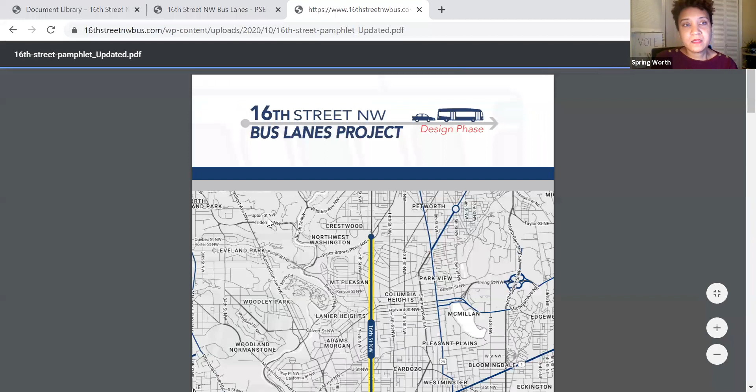There also are narrated presentations that provide an overview of the project from earlier years, if you're interested in taking a deeper dive into the project details. So this is the pamphlet, and it gives you a general project overview of what we're trying to accomplish along the 16th Street corridor.

I do want to say, as I mentioned before, that we've completed design, so we're really happy about that, and we anticipate starting construction. So we're not taking any comments on the designs. We're getting ready to break ground on the corridor.

There have been a couple of small changes since our last public meeting. We originally anticipated putting in hatched bus lanes, like a striped red bus lane and black asphalt. But to remain consistent with what you see on other corridors in the district, and across the country, we are putting in full red bus lanes.

Similar to Georgia Avenue, we have bus lanes from Florida to Barry, and also on H and I streets downtown, you'll see bus lanes. These bus lanes will be very similar, full red paint.

The other change we made during design, to accommodate traffic operations, is we are starting the PM peak period at 3:30, extending to 7. We originally proposed during the planning process that we would start the PM peak from 4 to 7:30, but we're moving that back just a little bit earlier. It's the same length of time — we're just moving the start of the PM peak to 3:30 to 7 instead of 4 to 7:30.

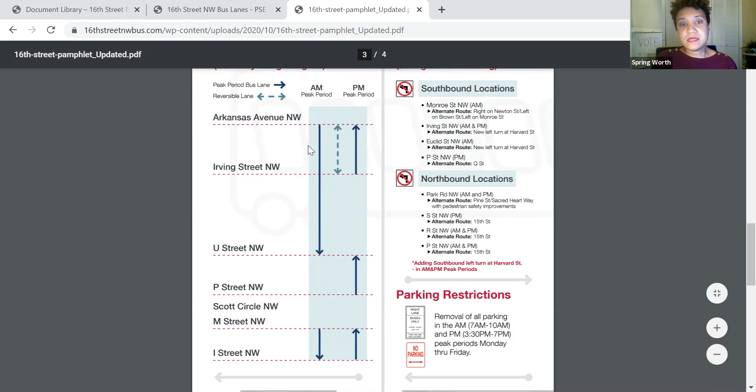Where you see the blue line here is where we will have peak period bus lanes. The AM peak will be extended by 30 minutes, so 7 to 10 a.m., and then the PM peak is 3:30 to 7. The bus lanes are peak period, peak direction, meaning in the morning the bus lane will operate southbound, heading towards downtown, from 7 to 10 a.m.

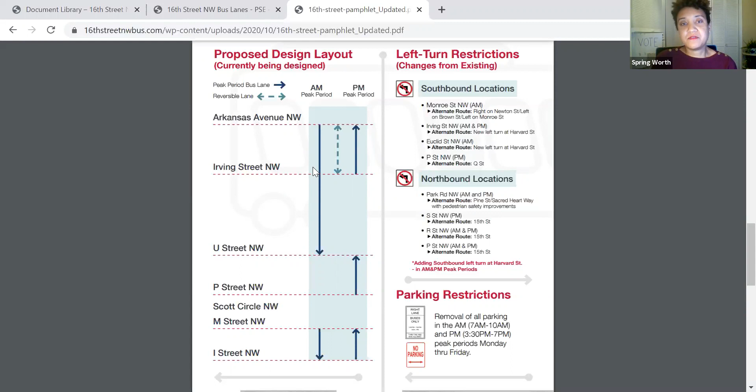In the evening, the bus lane will operate in the opposite direction, going outbound, heading toward Silver Spring, from 3:30 to 7. There are also some left turn restrictions that we shared at the last public meeting and that have been up on our website — those still remain the same and are listed here.

We still anticipate beginning construction this year. We've completed the designs. This is the project website, and here's my contact information. I got all of this from the project website.

If I go back here, this is listed under the document library, and then the final design plans are also listed here, which provide the signage and striping plans for the corridor.

As I mentioned before, we're putting in full red bus lanes, similar to what you see on H and I streets and Georgia Avenue. Also on MLK Avenue Southeast, we recently put in bus lanes on that corridor, so you'll see something similar there too.

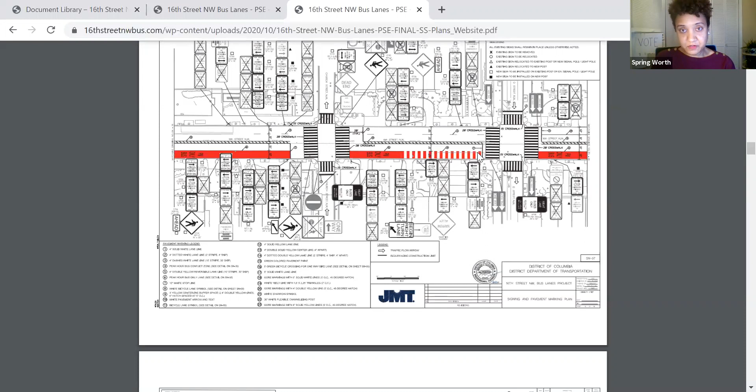These are just the hatched areas. Instead of doing the whole area hatched, these hatched areas will be for areas of conflict or turns, just to alert motorists to what's going on.

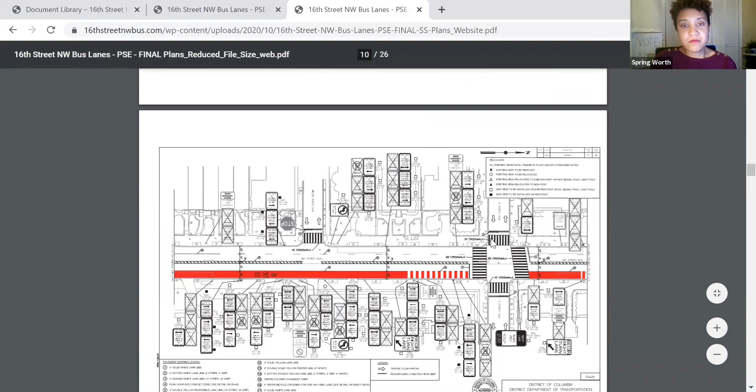You can go through here, and if you have any questions about the designs — like I said, we've completed the design, we're not making any changes at this point, we're moving forward with construction, and we're all really happy about this. I've been working on the project since 2016, and we're happy to complete the designs and move forward with construction. So with that, I'll open it up to see if anybody has any questions.

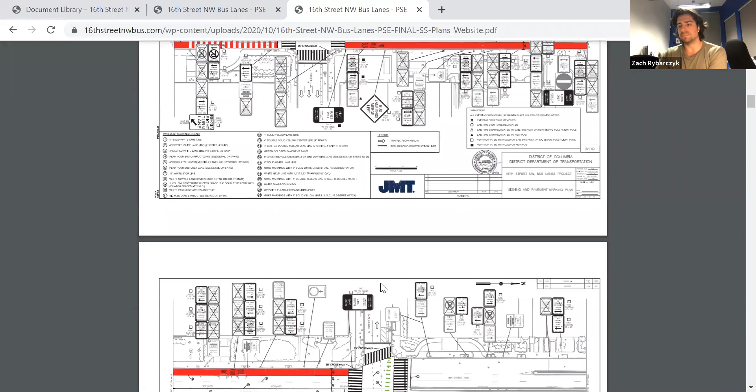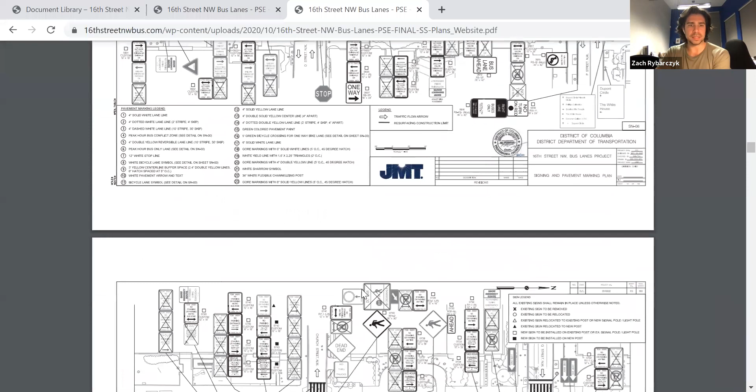I was wondering if you could walk us through the intersections of Harvard and Columbia on the final plans, and dive into, now that eastbound traffic will be taking Harvard instead of Irving, what safety mechanisms or what DDOT expects to happen on Harvard and 15th and those surrounding streets.

Yeah, so before I take a deeper dive, since I'm sharing, just for familiarity I'll go back to the left turn restrictions in the pamphlet, and then come back to the designs so we can talk through it, just so everybody's familiar with what we're talking about.

So we are restricting some left turns, the left turn at Irving Street. Right now, if you're heading southbound on 16th Street, you can take a left-hand turn onto Irving Street Northwest, like heading towards the Columbia Heights Metro Station. And we are installing a new left turn at Harvard Street. Today, you can't take a left turn onto Harvard Street, but as part of this project, once it's installed, motorists will be able to take a left turn at Harvard Street during the peak periods.

And the reason why we put in this left turn at Harvard Street was to ensure we'd have enough space for a bus lane and also to accommodate traffic operations. If you want to look at all the left turn restrictions, they're here in the pamphlet. I just wanted to say that this is during the AM and PM peak.

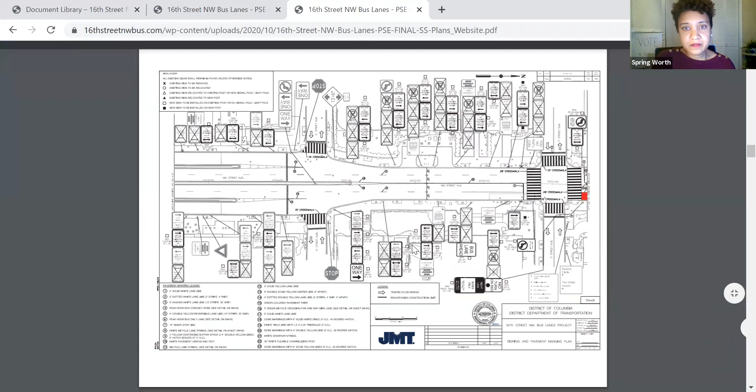Now we can go back to the designs and look at what's happening in that intersection. This takes a second to load. See the blue line at the top. I don't know if that's coming through on your end, but I will scroll down. Let me make it bigger so I can see the cross streets.

So we're now in the Logan Circle area, and U Street, Euclid, almost there, Fuller, all right, so Columbia Road. This is the area where we're modifying these concrete islands here and extending the road just a little bit, by roughly a foot, to allow for the bus lane to be continuous.

As I mentioned, this is Harvard Street here, Columbia Road here. What we're doing is adding a left-hand turn so vehicles can make a left turn onto Harvard Street during the AM and PM peak, which will be important because there will be a left turn restriction at 16th and Irving during the AM and PM peak period. The purpose of that is to accommodate traffic operations and also to accommodate a bus lane through this intersection.

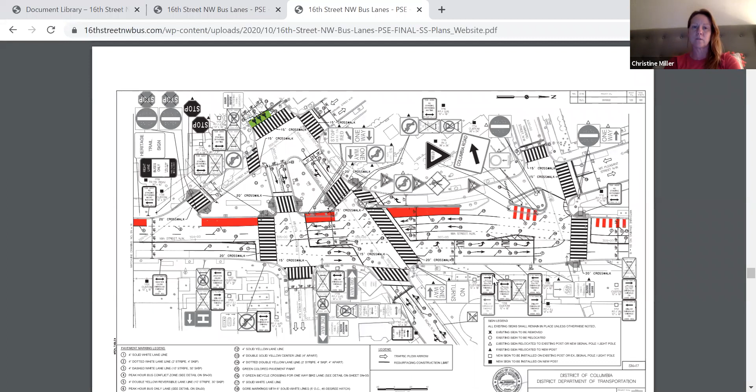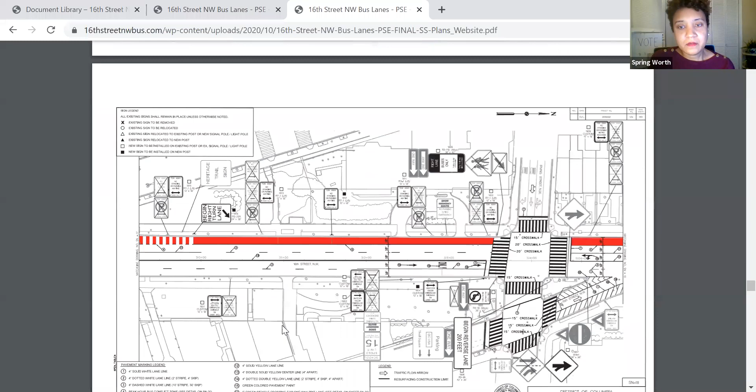Yeah Spring, could you please go through the safety additions for that restricted left turn from Park, directing it to the jug handle at Pine Street Sacred Heart Way? Let's make sure I don't skip over anything.

All right, Irving, and then this is where the bus lane picks up for Irving. This is Lamont where the library is, and then Park Road. And this is the jug handle.

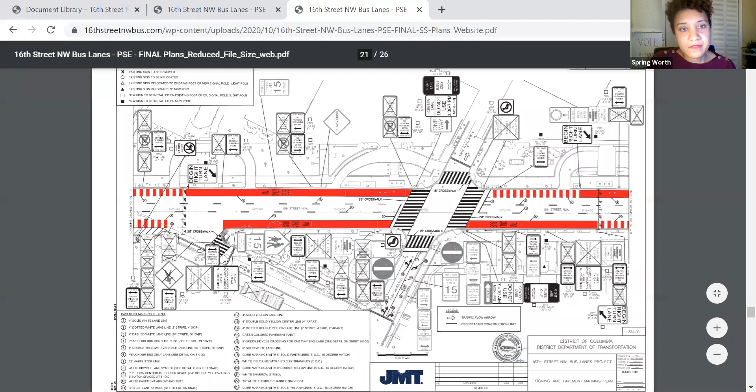Let me give a little background. This is to preserve the bus lane going northbound, so we have a PM bus-only lane going northbound, and we are restricting the left turns onto Park Road. Today you can make a left-hand turn from 16th Street going northbound onto Park Road, but as part of this project, we're recommending that vehicles turn down Pine Street Sacred Heart Way, and the jug handle is making a right down Pine Street where the church is, just for familiarity, and then making a left onto Park Road.

So instead of going this way, we'll go this way, make a left, and go up Park Road.

As far as safety, we are adding a crosswalk at this intersection, and we will be monitoring the traffic flow to ensure that vehicles are traveling at a safe speed. The speed limit is 15 miles per hour, but we want to ensure vehicles are traveling safely and that this works. From our traffic analysis, which we spoke about a couple of years ago, it looks like this does work, but we will monitor it.

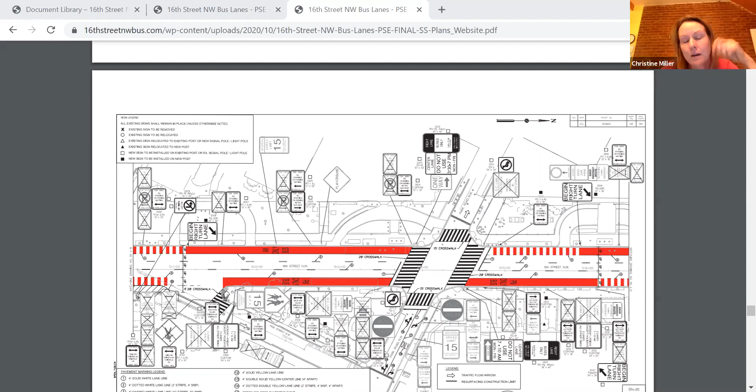Can I also ask, what I'd really like to see is something like a HAWK light put on that crosswalk, something that really alerts drivers to the change, the drop in the speed limit, but also just really grabs their attention. I'd like to see a HAWK light or some sort of pedestrian beacon.

We're going to see whether we can do a study to find out if it is warranted there or not. We can do an RRFB study.

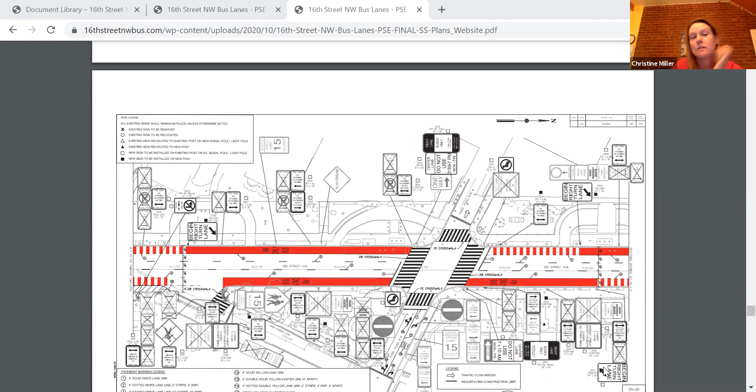Is that something that you can do before we start rerouting traffic? Well, yes, this contract for the construction for these projects is going to be underway soon, and contractually speaking, we cannot make any changes to the design with the current contract that we have. However, being the fact that we are the team that designed this project and we are also the safety team, we can have a separate study to look into it.

We can study the future condition, whether any type of rapid flashing beacon or HAWK signal or anything is warranted in that area or in this specific intersection. We can probably have something studied in the next 4 to 6 months, and we'll make sure we keep you in touch. I'm sure Spring has your contact info, and we'll reach out to you.

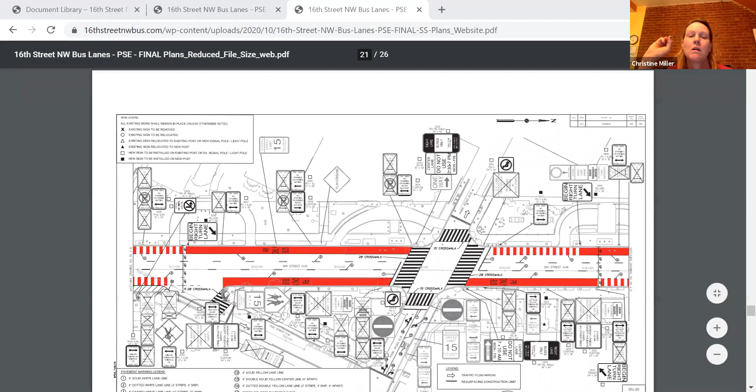Because when I'm seeing this 15-mile drop, I know in our school zones we have flashing lights on those signs to identify a decreased school zone, 15 miles per hour. Is there anything we can do to flag that speed limit drop? Yeah, I think we can look into making an update on the signage over there.

While we're on that intersection, the bulb-outs that you mentioned, are they on this design plan, or are they something that will be there but it's not on the plan right now? They are on the design plan.

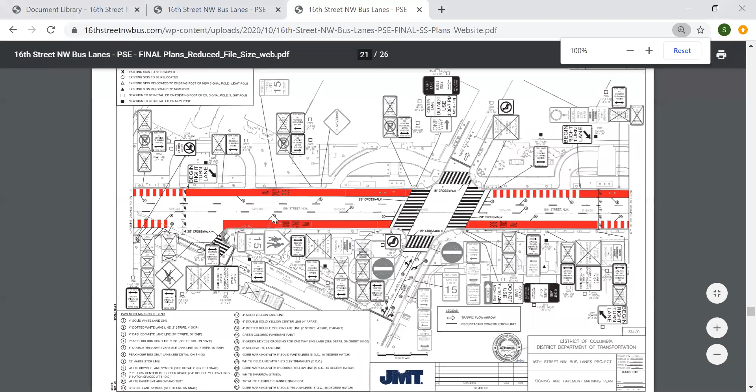So is that little sort of bump out below the hatched red lines? Spring, can you please zoom in for me? There we go. Is it showing up on your end? Everybody see that? Yeah.

The sign that Spring's cursor is on is hiding how the bulb-out is. If you can see right at the start of the turn where number 22 is, right there, that's where the bulb-out starts. The darker font is the new curb, and the one that is lighter, a few feet behind it, is the existing curb. Can you see that, Spring? Can you hover with your cursor? Oh, the other side. The lighter one to the left. So that one is the existing curb, and the one that is darker font is the new curb.

I know the design is done, but I'm going to ask why you didn't do the raised crosswalk and why it's a 20-foot width. What would prevent you from making it a narrower crossing and therefore safer for people to get across? Well, instead of 20 feet for one, Pine Street has to be 20 feet because there's 2 travel lanes. So that's the logic behind that. As far as the raised crosswalk, we just didn't think it's the best way to deal with this, but it is still something that we'll be looking at as a mitigation strategy for later.

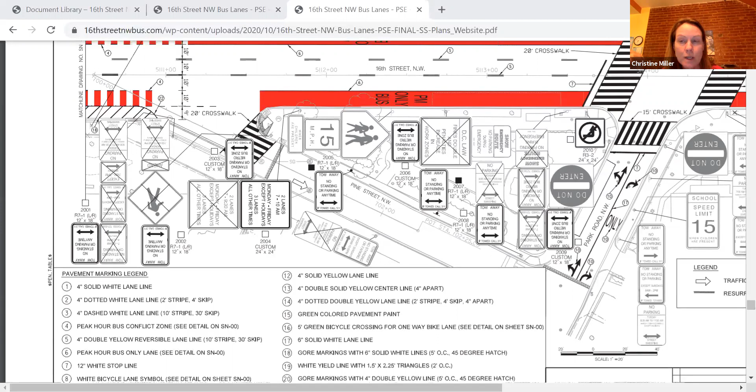So right now I'm seeing that there is no exception even for Sundays for church parking. Actually, this is something we looked at a lot. It is not legal for DC government to have 'except church parking' signs, and we ran into that problem in other parts of the city.

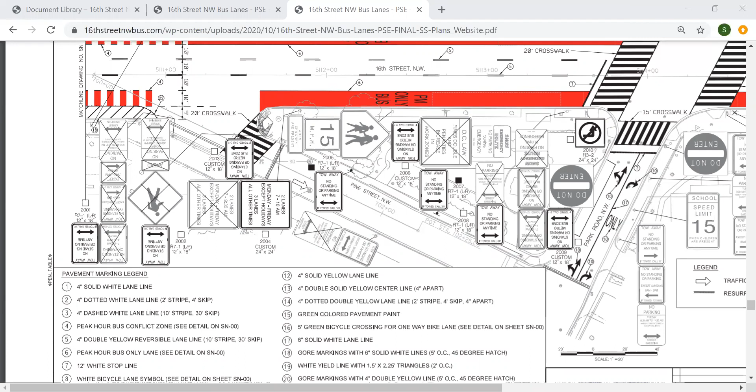I mean, what's the reasoning for getting rid of that parking across on the west side? I understand it was never supposed to be parking, but the question is, I was also confused looking at this, why we had such a wide street that doesn't encourage slower driving. Why wouldn't you just keep the informal parking and formalize that?

Something I wanted to also share with you, just a little bit more detail on this intersection. I'm going to stop sharing and try to share something else. Just one second. Let's see, show all windows. Just a second, there's too many windows open. Just one second here. Oh, that's not it. Here we go, here it is. All right, I'm going to share that.

Can you see that? This gives a little bit more. That's much better, thank you. The crowding of the signage there makes it really hard to see, but this is the improvement that's going to be taking place. Thank you, Spring.

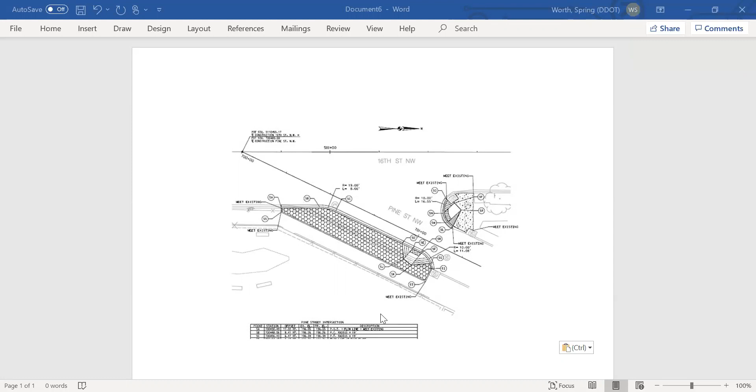So what are we ending up with in that crosswalk distance? Go back to the design. Just a second. Now I'm going to go back to the design, it'll take just a second. All right, that's easier to find. All right, so this is the crosswalk. Othman, do you want to talk through that?

Yeah, so we extended the curb by a few feet. I don't recall exactly how many feet, but it's going to be a much narrower crosswalk for pedestrians.

Thank you for the clearer depiction there. I'm just still a little bit confused here, because first of all, just the travel lane once you're driving onto Pine - if I'm understanding this correctly, with the exception of Sundays, it will effectively be treated as one travel lane with no parking on either side. Is that right? What's the curb to curb width there on a typical weekday?

I think it's 20 feet, but I don't have it in front of me for sure, but I think it's 20. That's wild, because that's twice the width of a typical travel lane. So effectively, it's two travel lanes turning into one left turn onto Park. That seems like really

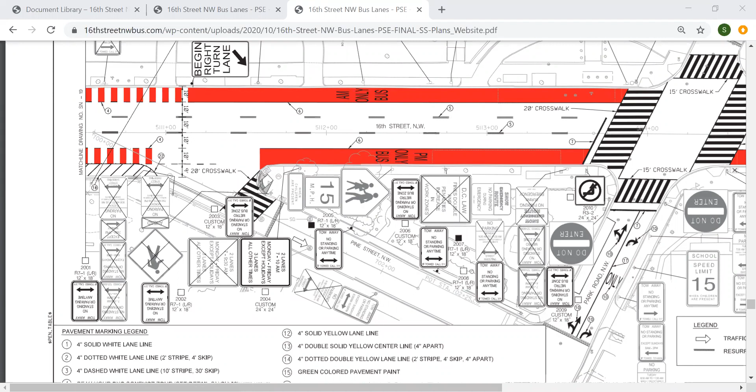That sounds much safer. We're asking why can't we get rid of the parking permanently. My understanding from what was just said was that there won't even be parking for Sunday because you can't do that. I think Commissioner Miller is referring to a First Amendment issue where you can't say 'church parking'. Oh, you just can't say Sunday. Okay, gotcha. We can allow parking on Sundays, but not explicitly say church. Right.

So I can share Google Maps here. We're not removing any parking for the corridor. We're removing parking on both sides of the street during the peak period, AM peak and PM peak, 7 to 10, and 3:30 to 7.

Let me stop sharing that. All these screens are open and I want to show them to you, trying to get this quick and fast virtually. Let's stop sharing this and start sharing that. Let's see if it pulls up Google Maps. No, I think it works when I have Chrome open, but not Internet Explorer. Let's see if we can go to the regular. Oh, here we go, I did have Chrome open.

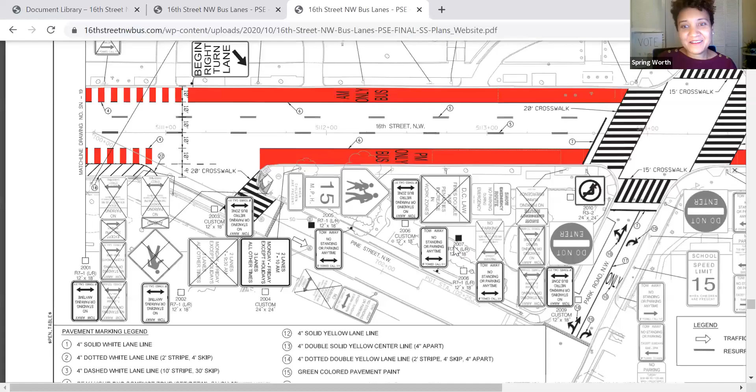Let me go back to the design and let's look at that. Let me just go back to that. Let me stop sharing here, open up, getting faster. Okay, thank you David, that's how I was reading it too. I'm confused.

No standing or parking anytime. These are the signs that you're referring to, right? Yes, here, yes.

I don't know what the current rules are there, but basically the new signage will clarify that there's no parking anytime on the west side. On the east side, it seems to be maintaining the current rule, no parking except for Sundays. So I'm still not quite understanding why — basically that is creating, except for a couple hours on Sundays, one 20-foot wide travel lane that then feeds into what looks like maybe a 9-foot wide lane that then goes onto Park Road. That seems excessively wide for the goal of improving that crossing.

I'm glad that curb extension is there, but I think something needs to be clarified about that parking. I don't want to leapfrog the analysis that needs to be done, but I think it might make sense to just keep the west side parking permanently, and maybe use that opportunity to shorten the crossing distance even further.

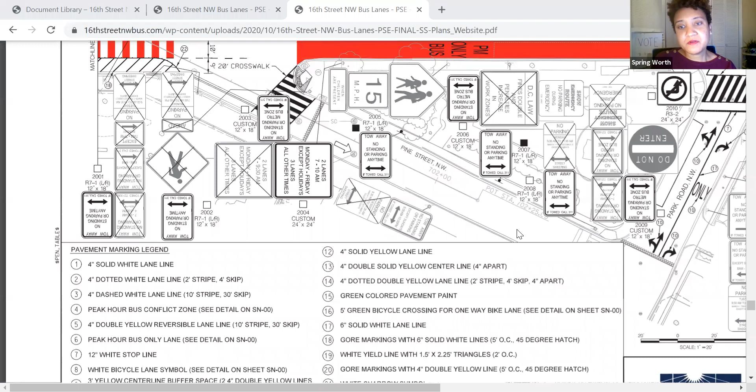We'll take a look at this. I will also say that 16th Street is a truck route, and we do have buses that will be coming on this street, so there are trucks. I hesitated because I don't know if the buses are being rerouted, able to take a left at Park Road, but we'll review and respond.

Okay, thank you. I mean, great — if there's a freight route that requires 20-foot lanes, I haven't heard of it yet in DC, so I'd look forward to talking about that.

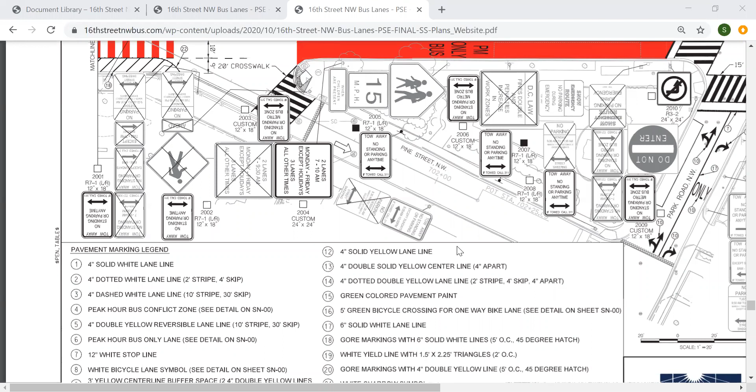And then my final point here, I'm sorry, we're really hammering this, but again glad to see the curb extension. I think the conversations we had in the past was that the curb extension could also function as hardening the angle of that turn — I think Commissioner Miller was expressing that. It seems like there's a hardscape curb extension plus what looks like some striping and bollards or flex posts, if I'm seeing that right. But that still combined adds up to a pretty aggressive turn angle there. So that's what was being got at. I'm glad that the safety team is going to look into that.

But I think it's a challenge that this is the curb widths we're ending up here, and that the crossing is probably not going to follow the desired path there, if that makes sense.

Thanks for sharing that. I don't know, Othman, if you have any immediate response to that. We will look into this, look into the concerns that you just raised. I think this is something that we will keep looking at, especially once we make those changes on the right turn. But yeah, thank you for the comments.

Thank you, Osmond and Spring. I know we've discussed this a few times. I think we have the dual priorities here of wanting to make sure that we're serving our transit riders well and having this be done sometime this century, but also making sure that we're addressing points like this appropriately. So happy to continue that conversation. That makes sense.

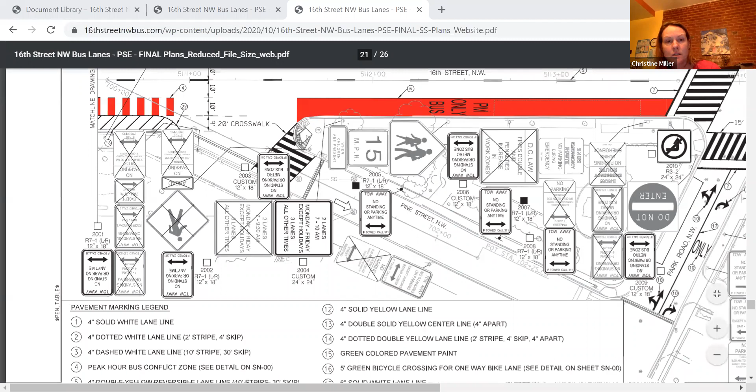No, but I do think there are some things I'd like to have followed up on, including the lane width, the parking, looking into hawk lights or flagging the 15-mile-per-hour decrease. And I also really want to know when we start those safety assessments. I assume it's going to be after the bus lanes are completed.

Yeah, we can follow up with you on that. I was just taking down notes here on the things for follow-ups for us. Like I mentioned before, the design is completed and we're getting close to beginning construction, but this is good feedback for us.

Thank you. This is outside the scope of 1A and frankly Ward 1 in general, but just out of curiosity, are there any changes to reflect 16th Street as it's arranged right now between, I guess, H and K with Black Lives Matter Plaza, which is currently closed to traffic? Is the idea that that's not permanent now?

So that area is currently closed. We will evaluate at the point of construction. The mayor has publicly said that the Black Lives Matter area will reopen to traffic, but we don't have any further guidance at this point to share.

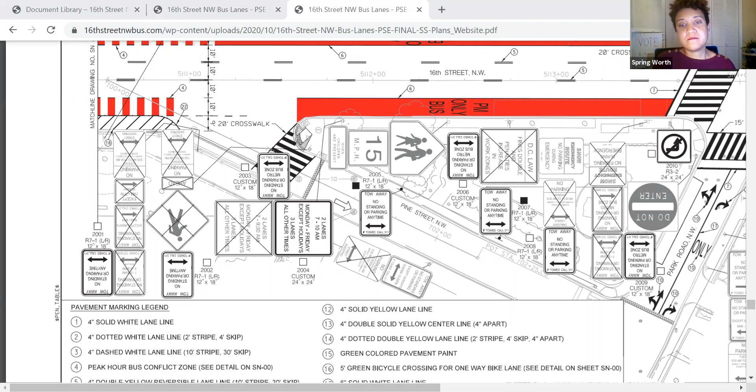And then there's one other thing at 16th and Colorado. It's not part of this project, it's a separate project. There is, I believe, a hawk signal going up there in spring 2021. That's outside of your area, but it's still along the corridor, just going south, closer to the park, Malcolm X, Meridian Hill Park. So that will be happening. It's under design right now. It's separate from this project, but still on the corridor.

Thank you, Spring. Yeah, I just asked because that was our other priority area, to make sure there were appropriate pedestrian accommodations. So very happy about that.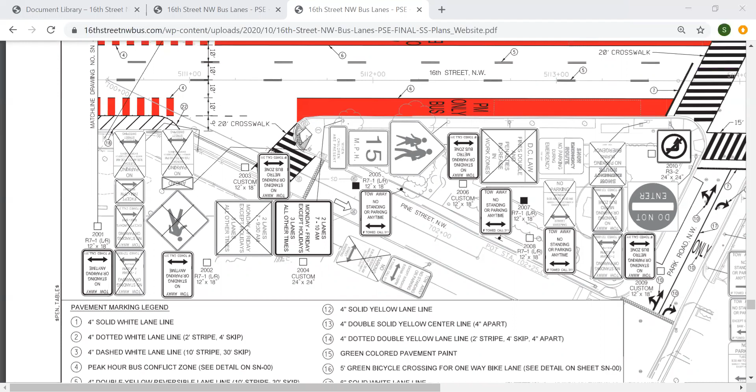Spring and related team members, would you mind going over the intersection of Spring Road and 16th and just talk about some of the safety features there? Because I know we've had, unfortunately, many complaints of, especially during reversible lane times, vehicles getting into accidents, turning off onto wrong lanes. And if you could talk about some of the pedestrian safety up there too.

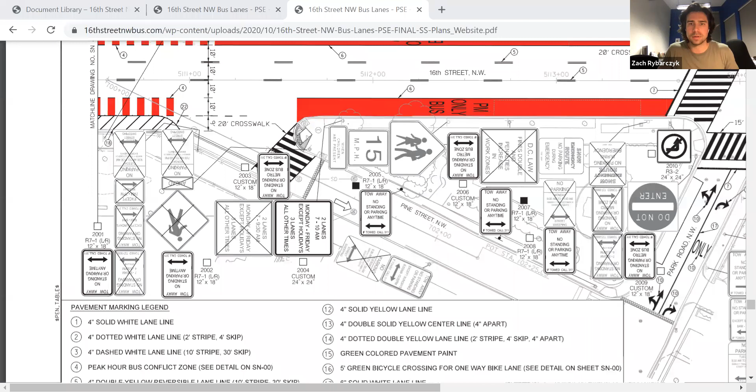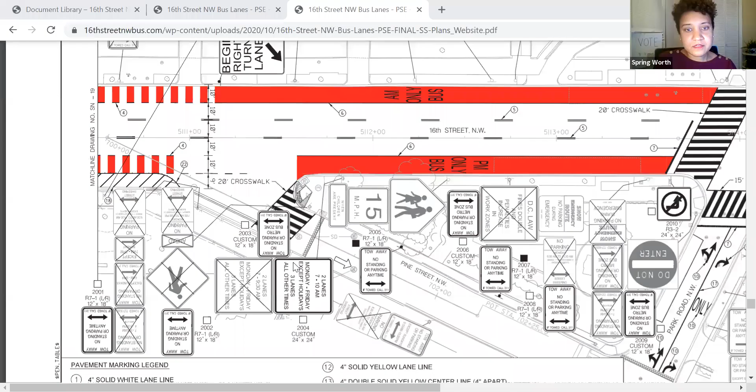Your screens, let me just take 1 second here. I'm going to stop sharing because somehow that got minimized, and I will start sharing again. Okay, share that. You all should see. So 16th and Park, that's Monroe. This is in the middle. Let me get this so that I can see. All right.

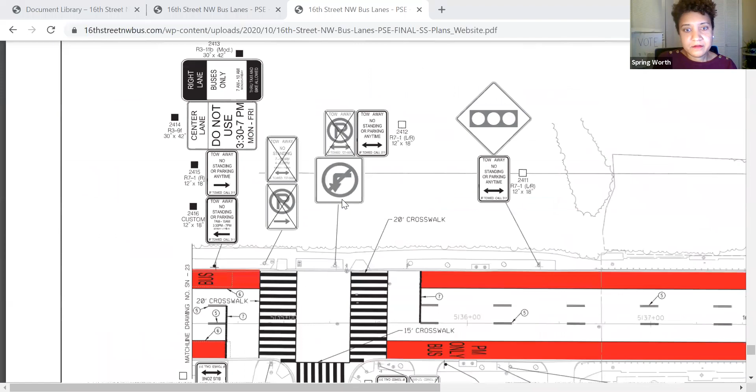Spring Road. Okay, let me minimize it a little bit so I can get this situated on the side here.

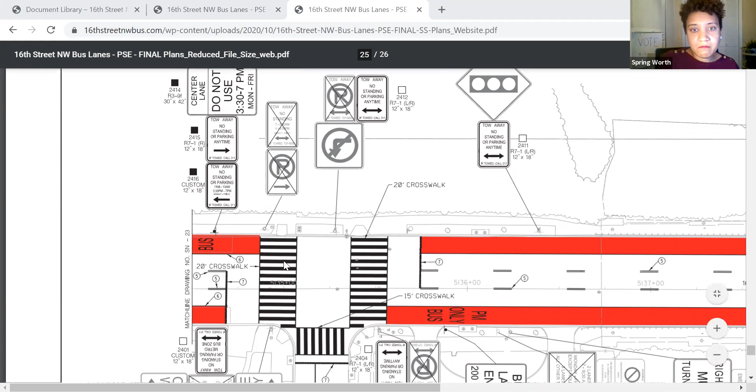So there were questions that you had about 16th and Spring. Are you thinking the bus stop? Move that over a little bit. At 3636, correct, at the Woodner.

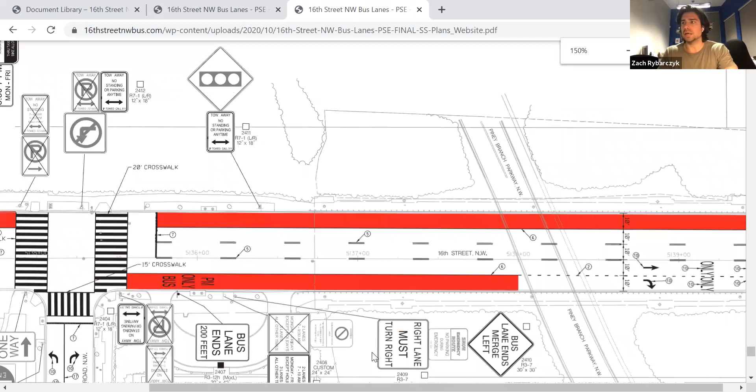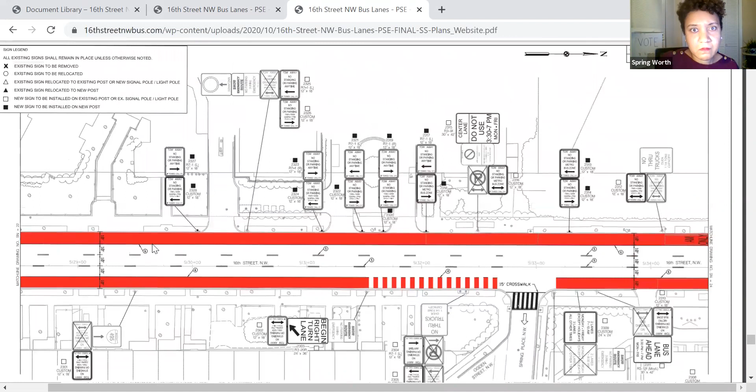That's Piney Branch, so that bus stop is actually, I think it's like, Spring Place, it's very close to here. Yeah, I know it's not my SMD, but I know residents between Spring Place and Spring Road were wondering about safety in their area.

There was a decision made a couple of years ago, one of the recommendations, so everybody has familiarity on what we're talking about. 3636 16th Street is the Woodner apartment building. There's a bus stop with 2 bus shelters in front of that location. It might be helpful if I shared this via Google Maps. In fact, I can do that and come back to this.

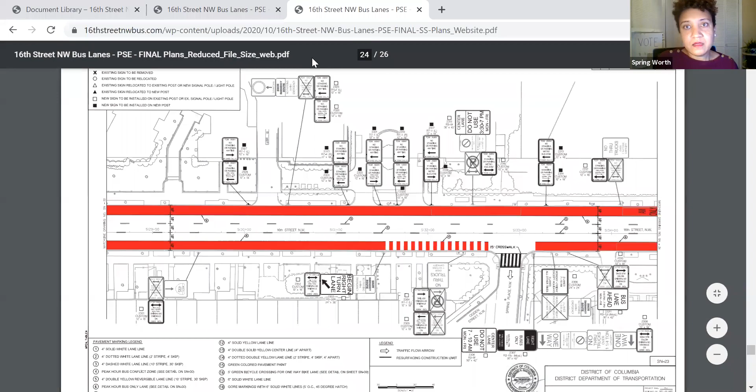There's a bus stop at that location, 2 bus shelters. It's a high ridership stop. The concerns that were expressed. All right, so let's get back. The concerns that were expressed, this is the Woodner.

All right, my screen is like, maybe if I just put in this. Concerns that were expressed were about bus riders, pedestrians crossing in front of, crossing the street to get to the stop. And we looked at this project, looked at what it would take for us to relocate the stop a little bit north. So this is the Woodner.

I'll scroll out, but not pick up this. Okay, all right, so this is the bus stop. Everybody sees that now. And the concern over the years has been that people are crossing, so crossing here to get to this bus. So you see the bus coming and you cross at an unsignalized crosswalk.